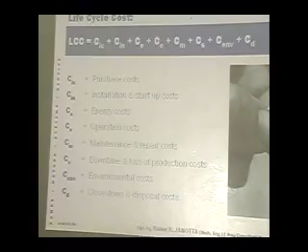As we can see, the life cycle cost of a pump system. A pump system consists not only of a pump, it consists of motors, pipelines, control panels and so on, valves, elbows, all of them predetermine where and under which conditions a pump may run.

A general misunderstanding amongst young students, which I encounter frequently in Germany, is they think the pump is the governing effect of a system. Because you can crank up or decrease the power, they think you get more or less water out of it. We all know this is not the case.

A pump is basically the slave of the system. The pipes, the elbows and all kinds of frame conditions, the heads, the viscosity and every other side effect determine the conditions under which the pump has to serve.

Now, as we can see here, energy in the life cycle of a pump system is the major factor. I read that power cost will increase to almost double, about 90 plus percent. And water will increase about 30 plus percent. Which means for us here, producing water will be much more expensive. We have to pay way more on the energy side than we can gain on the water side.

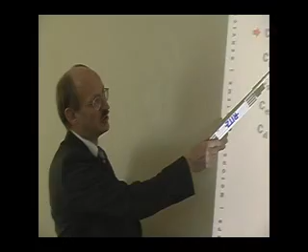Now, the cost of a pump system consists not only of the energy cost during the run, but also some other operation costs like maintenance, people, employees, installation and startup cost. But the major factor, energy, will force us to look into very efficient technologies.

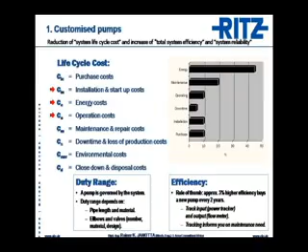Now, efficiency, this is one thing to always bear in mind. There is a general rule of thumb. If you have two different pumps, one gives you 3% higher efficiency, the value of the pump is paid off in about 2 to 3 years.

Now, we talk in terms of high efficiency pumps that are designed for the very specific application. We do not recommend taking anything from the shelf of some manufacturer just because it happens to be there, and using it because it might somehow more or less work in that installation.

We do serious consideration of all the frame conditions. The more we know about your problems, the better we can come up with a solution that brings you about 10 to 15% higher efficiency than a regular run-of-the-mill pump in the system.

And I don't speak only of the pump, I speak also of the coupling, the motor, the piping and the control systems. Now, if 3% pays off a pump in 2 to 3 years, you can calculate what 15% better efficiency can do. You pay much less in energy, in power, for the same quantity of water. Or if you pay the same amount of power, you sell about 15% more water.

That pays off the price of a pump in about 4 to 6 months, easily. The second advantage of customized pumps: they live much longer, they are more reliable.

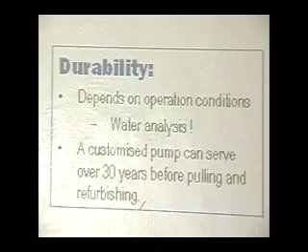Durability depends on the fact that the pump is detailed, customized for the application.

Of course, a water analysis is very important. You find that also to be answered in the questionnaire, because depending on what kind of chemicals the water contains, we have to choose different materials of the casings, of the impellers, of the sealings, of the bearings, maybe some lubricants that we change, so that they are chemically resistant.

Also the contents of solid materials. What kind of solid materials? How much? Because that affects the weight, the specific weight of the water. Then the motor has to be chosen bigger if the water is heavier due to solids.

What kind of solids? Are they abrasive? What is the particle size? What kind of abrasives? Then you have to choose either a different impeller material, say aluminum bronze, stainless steel, or even duplex steel, sometimes full duplex if it's chemically aggressive also.

In terms of chemicals, it's not always going into the more expensive side. It could also become cheaper. If there are certain chemicals consistent in the water, it could be that we downgrade, say for instance from aluminum down to grey cast. That is sometimes even cheaper.

Now, what kind of pump technologies do we typically use here in water procurement? Sometimes as intake, we have for raw water submersible sump pumps. Quite standardly, we have for boosters a multi-stage pressure pump, high pressure pumps. Submersible pumps are very common in boreholes if you have water procurement abroad and the groundwater level is deep.

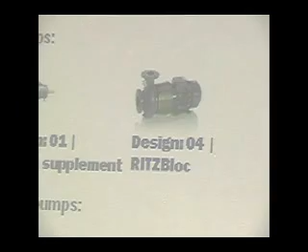This one, I would like to show you a movie on that. An axial split case. It's good for large quantities of water being procured, large flow.

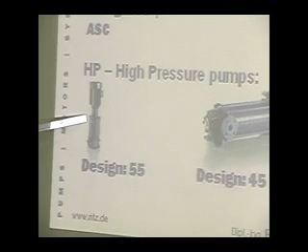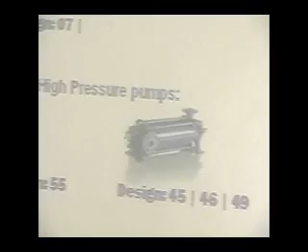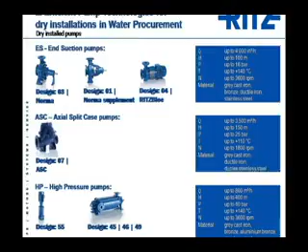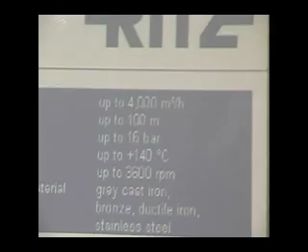As you can see, the technical data range differs quite a bit. Here we have about 4,000 cubic meters, here we have about 800, but the pressures are different - 40 bar compared to 16 bar. As I say, 65 to 70 different families of design give us a huge range of applications. Sometimes if we are receiving inquiries, our technical department works for about 2 weeks on one quotation, just to find the best solution for your application. And you will receive questions on that.

As I said, water procurement in boreholes is quite often done in submersible pump technology. It's not restricted to boreholes though. Sometimes you can just lay it down in the riverbed with a casing if need be, or if there is a technical advantage to it. I'll give you an example later with the modular technology.

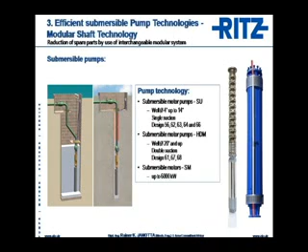Now, this can also be used as booster pumps because this technology, a conventional submersible pump, gives you a head of about 350, 450, maybe 500 meters. Sometimes you have mountains to go up or stations that you have to feed over large distances. And here is a technology that gives you, and we have a world record there, I'm proud about it, 5,500 cubic meters an hour on 1,600 meters head. 1,600 meter head in one stroke with one pump. This is a world record, and I'll tell you the technology behind it somewhat later in the presentation.

So if you have large distance, if you have a problem with your pipelines, or if you have extreme problems with the heads, that one can do it. I can assure you on one thing though, this baby costs a bit. I can assure you also, this baby earns money much more. It comes from the mining technology. It's spread out worldwide. In Germany, we have a very great mining company that works close to us and allows us to do test runs.

One of those beasts was in service 38 years without being pulled. And then it went for refurbishment and goes in for another 15 to 20 years of service.

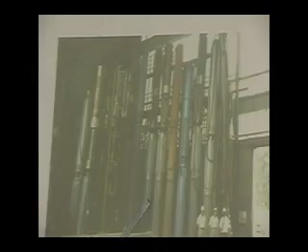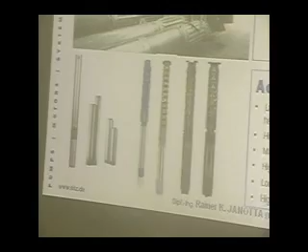Modular technology - this is one that you might probably like if you have changing frame conditions or different boreholes of the same diameter but with very different water levels. This was a picture taken in a German client's facility. These are all spare pumps. It's a big mining company. They have different holes with different water levels, and for each borehole they need one spare pump just in case, as a standby.

Now, why do they have it? One pump can do small water heads, one bigger, one still bigger, one very big water heads, but you cannot use the super big one for the small levels. It cannot operate there properly - it's outside the duty range. It would be really nice if you had a pump that can breathe with the applications.

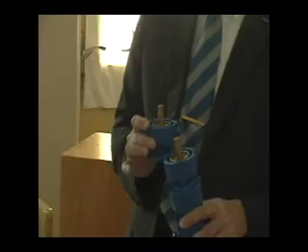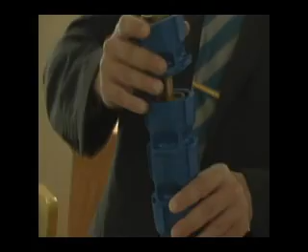Now what we came up with, I wish I were it, then I would be wealthy, was to put a modular system. There is not one solid shaft with solid impellers fixed on there. This pump comes in packages with modules - casing, stub shaft with the impeller. Now, if the water level goes down, if you need higher heads, you take the pump, add one module, screw it on with, I think it's 12 screws up to 24 in the bigger sizes.

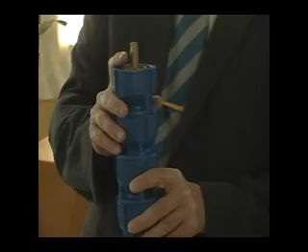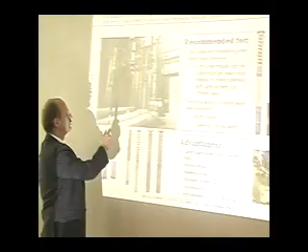If the water level goes up, if you don't need that much head to be pumped, you remove one or two sections. If you have different boreholes with different water levels, some of those modules only is the stock keeping - these are the spare parts. You don't need to hold back all spare pumps, just a few modules and maybe one or two motors, one for the smaller heads, one for the bigger heads. So this is the former situation of stock keeping. Some modules, one or two motors, maybe a cooling jacket, that's it. End of stock part keeping.

The pump is very flexible also if there is a clogging. Typically the first and second stage of a pump are the ones to be clogged. Now, about downtime: if you need a spare pump, or don't have one, you have to pull the pump, dismantle it, and you have several days of downtime with no production. Here, with this system, you take the first and second stage out, bring in new modules from stock, put the pump back in service, and clean the two modules to put them back in your stock. I think that's a very brilliant idea.

Third, pumps are not the only part in a pump system. In terms of efficiency, the pumps need to be tailor-made to the application. I would recommend the coupling with the motor be tailor-made for that very pump, and the control panel be custom-made and designed for this motor, coupling, pump, and pipeline application system. That's how we squeeze out efficiency of 85+% in the best case.

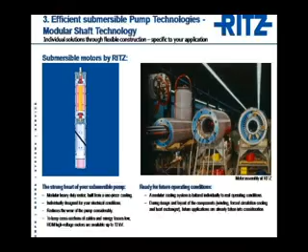Up to 6,000 kilowatt, which is 6 megawatt. So the bigger ones we do all ourselves. Typically they are rewindable.

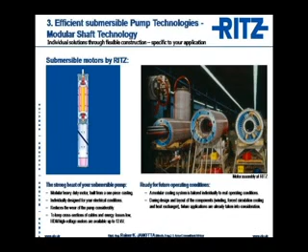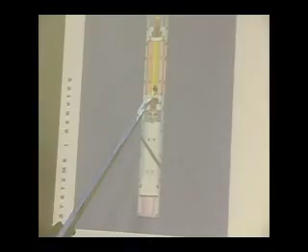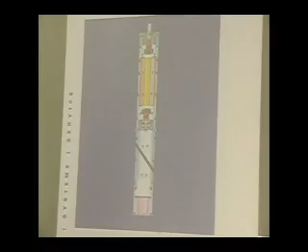The submersible motors are all water-filled, and we have a couple of patents that allow us to use our motors in the severest conditions, where other motors heat up and burn out because they cannot get the heat out of the anchors. We have a forced water flow inside the motor, and the coolant always carries the heat out to the casing. If that's not enough, there are cooling jackets the water can also flow through, using the extended surface of the cooling jacket to get the temperature out into the surrounding water. So these motors can survive under stronger conditions or in warmer water than other standard motors can.

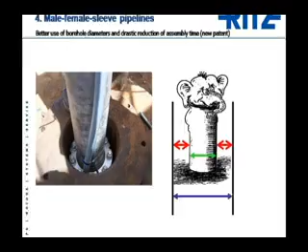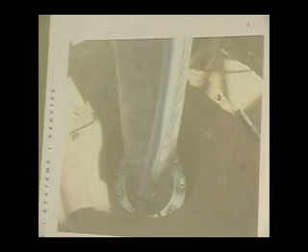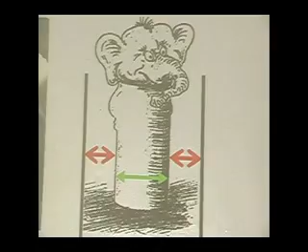Now this is a little exotic thing. Normally one thinks a pump manufacturer has nothing to do with pipelines, but in terms of efficiency, we think we have to. Why? This is a standard pipeline in a borehole. It would be so nice if we could use all this borehole diameter for water procurement, but we lose a lot due to the flange diameter. So this is the borehole, this is our loss due to the flange, and this is the little thing we have left. This elephant is not quite happy.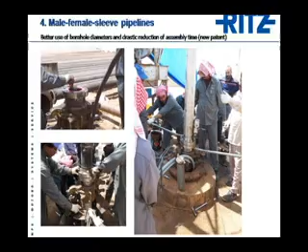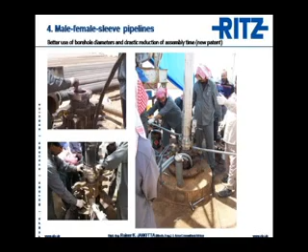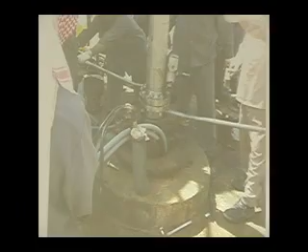A second thing with classic flanges is assembly time. These are pictures taken from some site in the desert, where with extensions and all kinds of aids, they try to really firmly tighten nuts and bolts. If you do that around this flange, it takes maybe 15 to 20 minutes per connection. Then you have another 10 to 12 meters of pipe done, another 20 minutes, 10 meters, 20 minutes. So this pipeline takes about a week till it's done. Imagine flanges of that size - you'd never get that pipeline done.

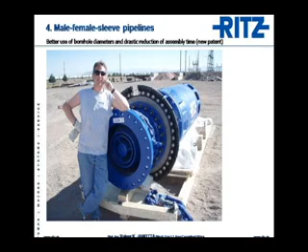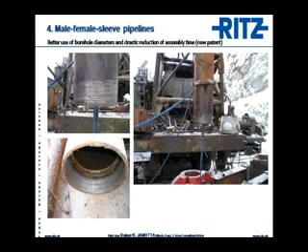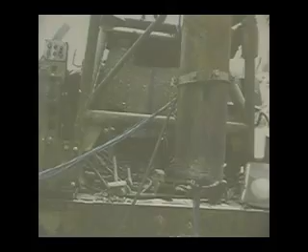Now the first problem, the diameter, could probably be tackled with threaded pipes. You know them from borehole drillings. Yes, you get a better diameter ratio compared to the borehole, but the problem is this threading equipment is very delicate because you need a clamping, turning, rotating, counter-clamping, fixing device, and this is easily broken and costly.

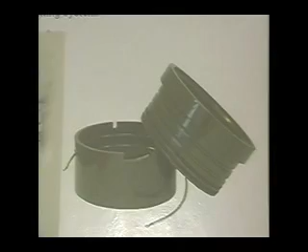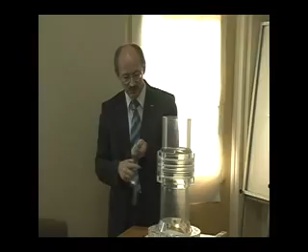This is just a plug-in and quick-fix idea, as I have it here in the model. You basically have a plug-in module with a few sealing elements. This is just the principle, not an exact detail copy. You basically set the pipeline connection - this is a linking chain. Actually it's fixed with two, but this is how easy it's fixed. The other one is symmetrically on the other side. End of story - pipeline done.

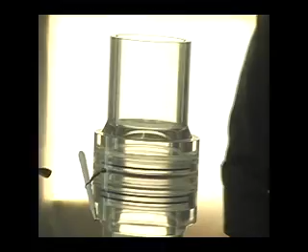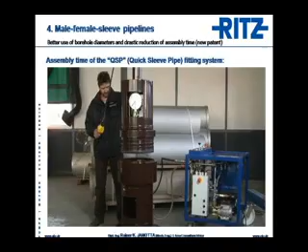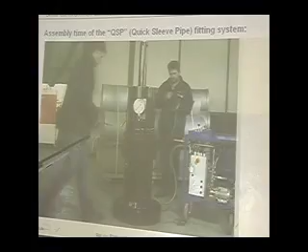And because you might claim this is just a principle model or a gameplay demo, this is an actual movie with two original pipelines during a certification. This certification was a pressure test for our strongest pump, the one with 1600 meters head - so this was a certification pressure test at 160 bar. And now I would like you to see how things are assembled.

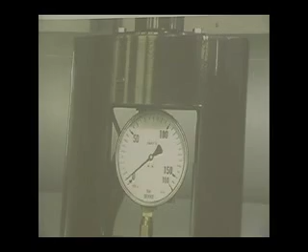This is the whole connection of the pipeline, about 12 seconds, let's give it 20. End of story, now it's pressurized. It's fully operational, that was it. The pipeline is done, you sink it down into the hole again.

Next 20 seconds, 10 meters, 20 seconds, your pipeline is done in a few hours, not in a few weeks. Because I was asked in a previous presentation whether this chain is damaged somehow, deflecting, bending, or due to any external forces, I had another video done after the pressure test, the disassembly.

That's how you disassemble this pipeline.

Now just to recollect, this is just a side effect, not the main focus. Of course it's a nice effect to have a quick assembly, but a borehole costs money, very very much money. If you have this borehole in the flange and only this little bit of pipe left, that's a bad ratio.

In this case, the same pipe, smaller borehole, or if you already have the borehole, you have a bigger borehole, and of course a lot more water coming out of the pipe. More water from the same pipe means more water you can sell, more cash intake. More water in the hole means lower velocity, less friction losses, less energy. You pay less to the power grid. You save on both ends.

The more questions you answer in the process at the beginning, the more you invest in brains, the better the solution will be. I'm extremely proud that when I joined Ritz and traveled all throughout these places, some people still remember a water station where a pump is still working after 30-plus years. It must have been a Ritz pump, and now it would probably be ready for refurbishment or replacement. That makes me really proud.

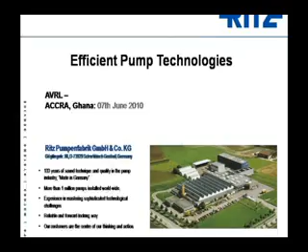Ritz considers itself to be a consultant in pump solutions. We're not just salespeople or traders. We would like to enable you to ask the right questions. You can use the questionnaire and ask different pump manufacturers these questions. They might tell you, I've never reflected upon it, I've never heard those questions. But we also come here to give you training.

Our service people can invite the station supervising engineer, or super engineer, or expert into Germany to do training at our headquarters. They learn how to assemble and manufacture the pumps if they like. With every station that we can probably serve with Ritz pumps, we'd like to invite the station manager and chief engineer in for practical training.

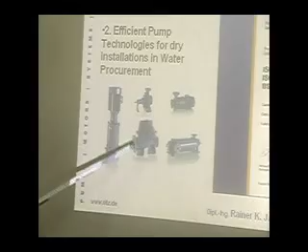But as you can see in the movie I'm about to show now in the break, the pump families are of alike design. If we know the ID number, the serial number of the pump, we know each individual pump from the last 45 or 50 years at least, back by name. We know what was done with it, how it was tailor-made, how the impellers were treated, how the bearing solutions came up. So if it's a familiar family, we should be able to manufacture, say, an impeller within a few weeks, say 2 to 3 weeks. It can be longer though if it's a very rare or very special big pump, one of this size or bigger. Okay, this one is an easy one.

Then we have to do the sand negatives, then they have to add the special metal alloy to it, then you have to cast it, it has to cool down and settle, because the cast, when out of the form, is not ready - it changes, like wood, it starts to live. Then we can do the surface milling, grinding, honing, or drilling to it. That might take a while.

But if it's a special material, I have to admit it will take time. If it's an emergency, it might be that Eric and his boys can do something on site just to immediately troubleshoot.

It could be that, for the time in between until the good pump is done again - yes, please - with the modular shaft system, if you vary the number of stages, what becomes of the driver unit, I mean the motor? So you also have to vary it?

Yes. You can operate with the same motor if we know up front that there are varying conditions. If you let us know not only the desired duty point, but the maximum flow, maximum head, the minimum flow, minimum head that might occur, and the desired operation point, then we can choose a motor-pump system which can fulfill this variety.

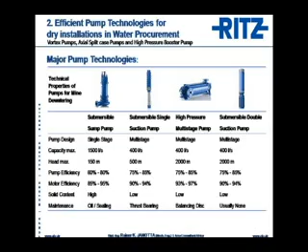It is something that I would like to explain. Say if you have a high pressure pump, they're all lookalikes. There are two different designs, one is the 45, one is the 49. There is one family maintenance operation manual. Every single 49 pump looks alike. So the family thing is basically an individual manual and instruction for this very pump.

A 49 looks different from another only in the number of stages, but they're all identical. The place of the sealings, the place of the bearings are all at the very same place. So that is in the manual, that is individual. The shape of the impellers is not probably too useful during the maintenance process, because you have an impeller of that diameter, you plug it in and that's it. So the differences of the pump, the custom makes, are in the detail shape of the shuffles, I would say.

The maintenance manual is the very same for every single 49er pump, and each 49 pump gets the 49 manual, gets the drawings, gets the designs, gets the instructions. Each 45 gets the 45 instructions, the 45 manuals.

In April 2007, there were 6.6 billion people on the planet. Every day this figure grows by 213,000. That's nearly 78 million year after year. The world's rising population is creating an appetite for resources that is proving more and more difficult to satisfy.

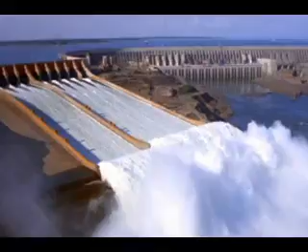The most vital resource of all, this liquid gold, is becoming increasingly scarce. Ever greater quantities of water need to be transported, often over very long distances. As quantity and distance grow, greater demands are placed on the pump technologies of tomorrow.

Here at Ritz, we have defined a new benchmark for these kinds of pumps: long service life, straightforward maintenance, flexibility, maximum efficiency, extraordinary NPSH values. These were the points of focus when it came to developing the innovative new pump. The result is a product that not only guarantees minimal operating costs, but also protects the environment. The environment will thank us.

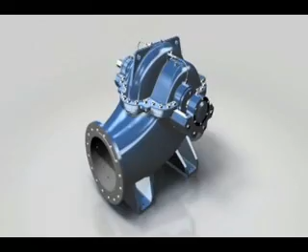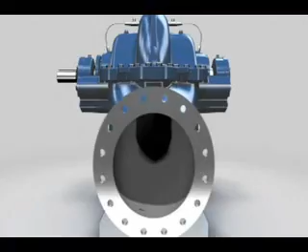The new ASC, designed for superior performance. ASC, axial split casing pumps that are tirelessly hard-working, developed for the hardest tasks, to pump huge quantities of untreated, pure and processed water, as well as mineral, lake and seawater, at waterworks, pumping stations and power plants, and for use in fire extinguishing systems, marine technology and the petrochemical industry.

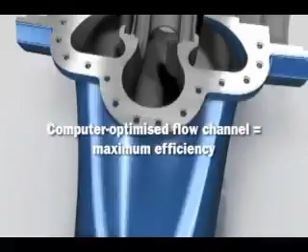Discover the numerous special features of the new ASC now. The flow channel on our ASC was developed using the latest technologies. The benefit? Maximum efficiency minimizes operating costs.

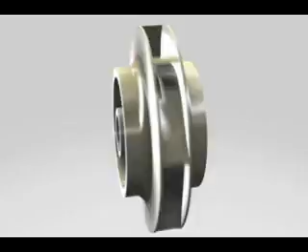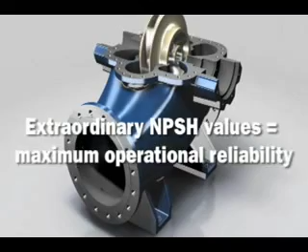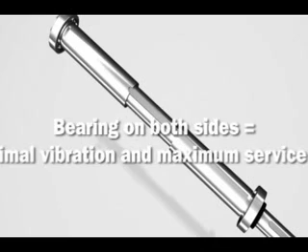Axial thrust and the resulting load on the pump bearings are reduced to a minimum thanks to the double flow radial impeller. The result? Minimal wear and maximum service life. The computer-optimized flow channel and extra-large impeller inflow areas ensure inflow rates are ideal while delivering great suction characteristics and an extraordinary NPSH value. The short drive shaft is guided on large, lubricated bearings on both sides. The benefit? Greater stability, quieter operation, and lower vibration, and therefore a long service life.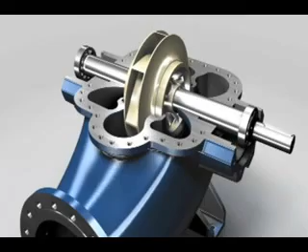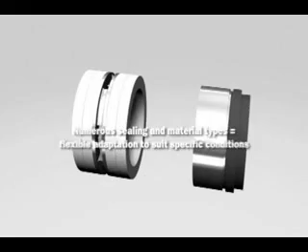The symmetrical design and identical components allow the drive to be positioned on both sides. Modifications can be made with no additional parts or changes to the product required. When it comes to sealing types, Ritz offers both a proven gland packing and a maintenance-free mechanical seal featuring high-quality design. Identical seal casings make it quicker and easier to switch to a different type of seal. A choice of materials and material combinations delivers the flexibility to adapt to specific conditions.

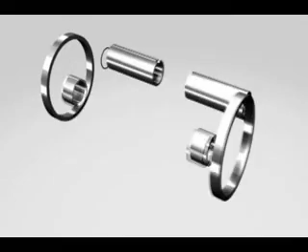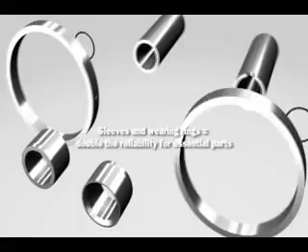The short drive shaft, double bearings, and double flow impeller ensure maximum service life. To minimize maintenance costs even further, wearing rings and sleeves protect all essential parts. Thanks to the axial split casing, the pump does not need to be removed from the pipe system in order to perform maintenance tasks or inspections. Simply unscrew and remove the cover. The top part is easy to fit thanks to automatic locking.

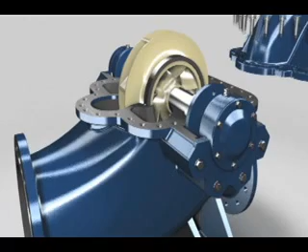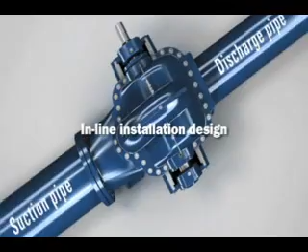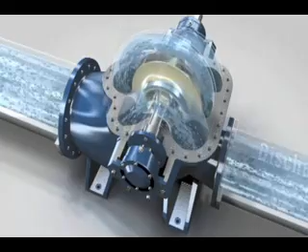The pump is fitted into the pipe system either horizontally or vertically, based on an inline design. The suction and discharge branches are situated opposite one another. Depending on customer requirements, different standards can be used for the bores on flange connections. The medium being pumped flows via the suction branch into the optimized flow channel. There it is pumped via the double flow radial impeller in the direction of the discharge branch.

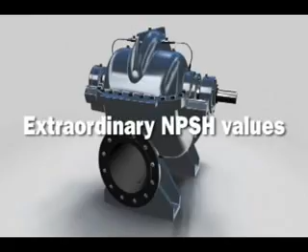Key benefits of ASC, an overview: long service life, easy to maintain, flexible, maximum efficiency, and extraordinary NPSH values. The bottom line is minimal operating costs. Or just said in one sentence, ASC, designed for superior performance.

On the cost of energy, looking at where we are heading, especially in the case of Ghana, every serious businessman will be thinking of energy costs. You mentioned we can have about 15% savings in efficiency in the pumps you make. Has there been any benchmarking, and is there any empirical evidence?

This is a very good question. The important thing I would recommend is that with every single pump you have in operation, you do an energy audit. You check how much power you put in and how much water you get out.

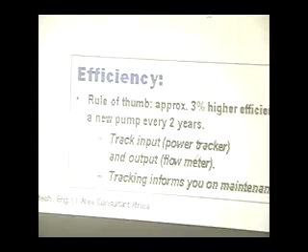The power tracking is similar to what you have in a car, telling you how many kilometers the car has run already. It clicks, click by click, and you get a sum. With a power tracker, you can do the very same thing.

You put it in the line between the control panel and the pump, or install it in the control panel, and it clicks. I'd recommend that either daily or at least weekly, you look at the figures to see how much power that system—pump plus coupling plus motor plus pipeline—has consumed over that period. On the output side, you have a flow meter, and then it's an easy calculation.

The ratio of power out to power in is your efficiency. For two reasons I would recommend that. Number one, because Ritz is not ashamed of any competition in efficiency—this is a good sales argument for our efficiency pumps. Number two, if the ratio changes, if you get less water out or need more power for your output,

then your maintenance people know something is about to go wrong. It might be that the impellers are clogging, or friction is increasing, or there's additional wear somewhere in the system. If that ratio changes, this is an alert sign for you.